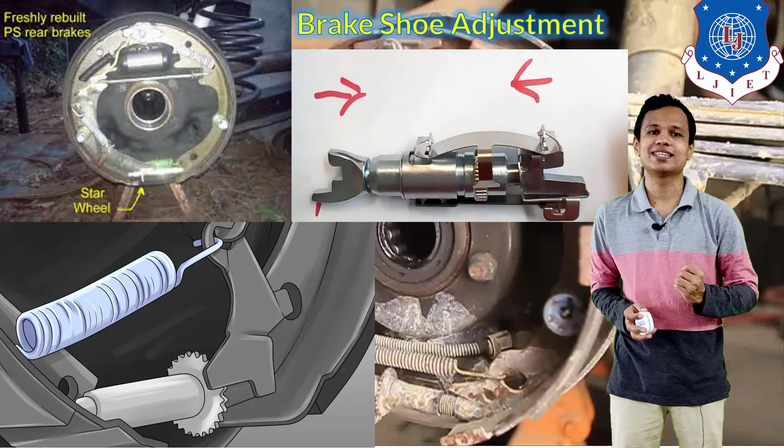First we will see about the brake shoe adjustment. This will be required whenever there is a problem in the braking effect, and in case of drum brakes. Whenever we apply the brakes, friction between the shoe and the drum causes the shoes to wear out over time. With this wearing out, the clearance between the drum and the shoes will increase, so to compensate we have to apply the brakes with extra effort. To reduce that effort and get better braking performance, the shoes will need an adjustment after some time.

The brakes we use nowadays have a self-adjusting system or self-adjusting shoe mechanism provided in them. But in older brakes, where the self-adjusting system was not provided, we require to manually adjust the brake shoes.

In the first figure, on the leftmost side, you can see a brake that is being freshly rebuilt. That rebuilt brake has the star wheel provided at the bottom part of the shoes. By rotating the star wheel, you can expand the shoes in the outer direction. For the adjustment of the brake shoe, we need to expand the shoes slightly to compensate for the clearance between the shoes and the drum.

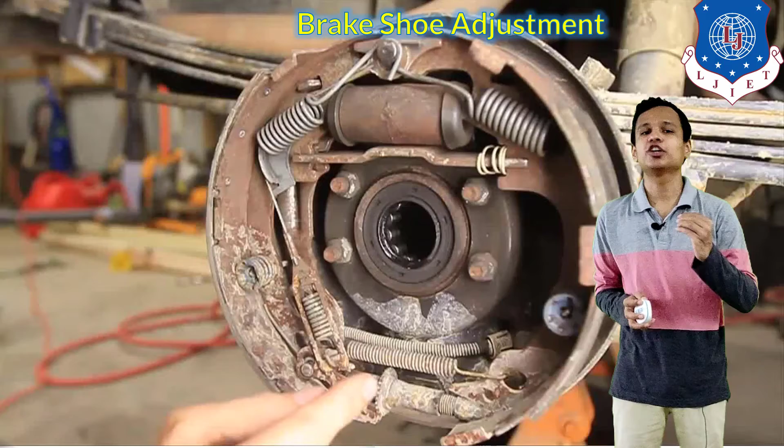Let's see the procedure for the brake shoe adjustment. The bottom part is the star wheel which is provided. To rotate the star wheel, we can simply use any object. First we have to release or loosen the nut from the back side, and that part, after loosening, can be used to rotate the star wheel.

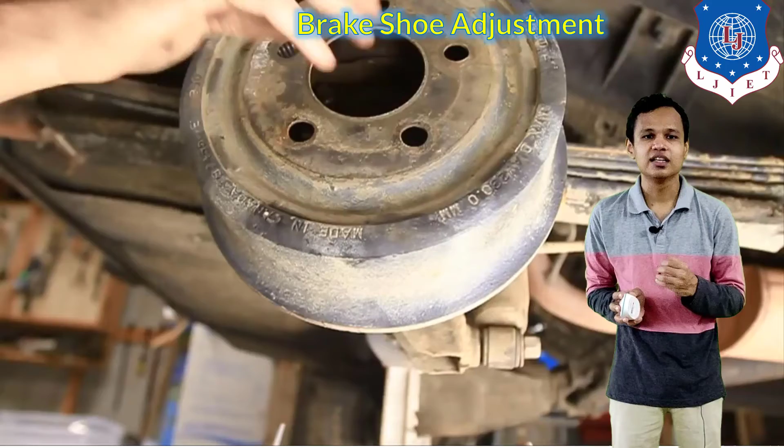The star wheel, with slight rotation, will keep expanding our shoes. As the star wheel is rotated, the adjustment gets corrected. After adjusting the star wheel, the braking effect is checked once again by applying the brakes. If it is not proper, the star wheel is rotated again, and after getting the required result, the brake shoe adjustment is completed.

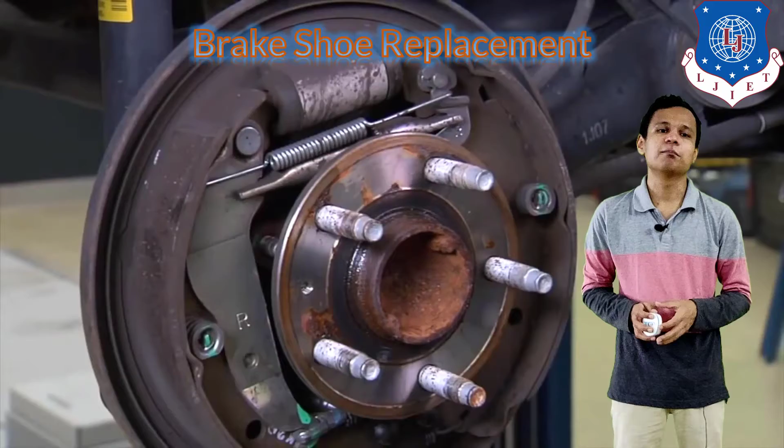Next is the replacement of the brake shoe. Whenever the shoe has become totally useless, the replacement will be done. First, the retraction spring connected to the brake shoe needs to be removed. After removing the retraction spring, the adjusting mechanism with the star wheel is removed. Then all the nuts connected to the shoes are removed, and one by one both shoes are removed from the system.

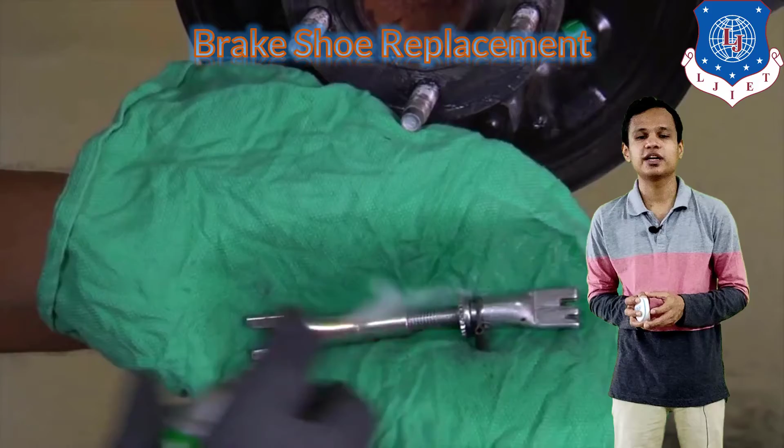After removing the brake shoes, the next thing kept in the system is the cylinder. That wheel cylinder will be kept on the back plate. After cleaning and required grinding and resurfacing processes, the procedures for the brake shoe replacement continue. The adjustment mechanism with the star wheel will also be resurfaced, and all required components will be replaced. After completing all procedures, the new brake shoe will be attached to the system.

After attaching the brake shoes, calibration is required for the new braking system. This calibration is done by adjusting the required position of the brake shoes, and after calibration we get the proper braking effect required in the system. This is how the replacement of the brake shoes is done in drum brakes.

Finally, the retraction spring is attached to the brake shoes so that after releasing the brake it can come back to its original position. Now you can see the calibration is done on the brake pad, and after calibration the force of the braking is checked.

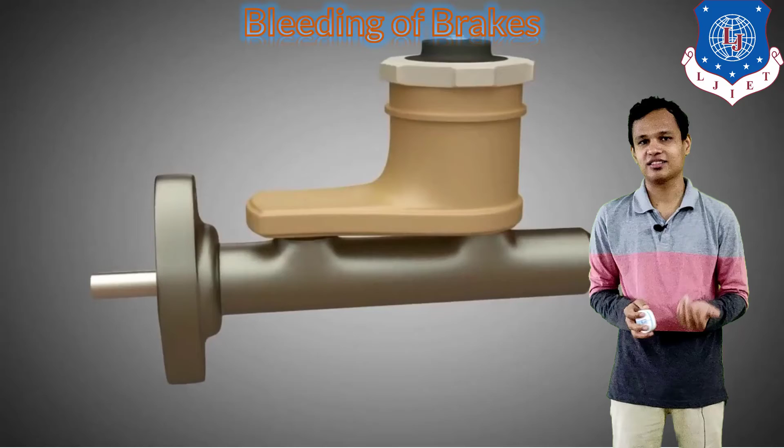Next is the bleeding of the brakes. Bleeding is required whenever there is air in the braking system. The air reduces our braking effort, and that effort is restored by bleeding the brake system.

Bleeding can be done on all four wheels of the vehicle, or one wheel at a time.

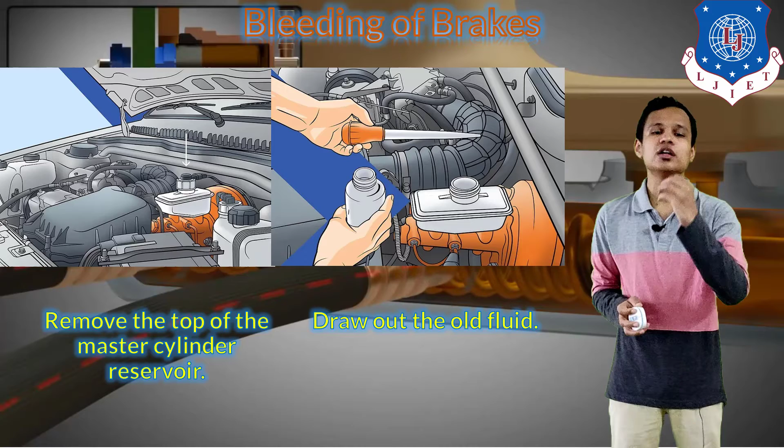First, we remove the top of the master cylinder reservoir. After removing it, we draw out the old brake fluid. Then we fill the master cylinder with new, clean brake fluid.

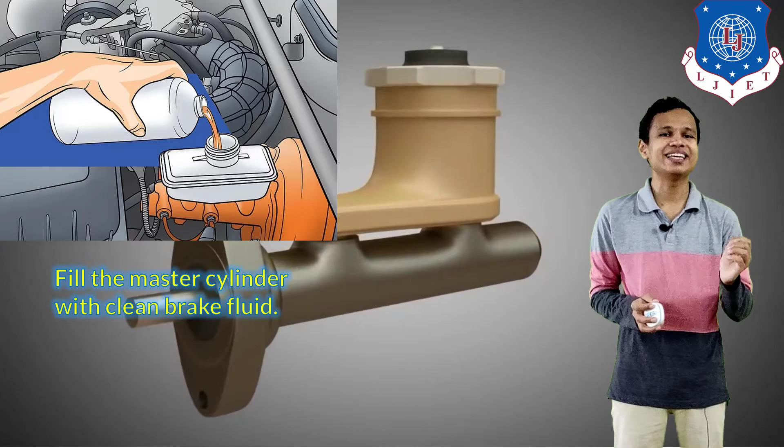We replace the top of the master cylinder reservoir with the new cap.

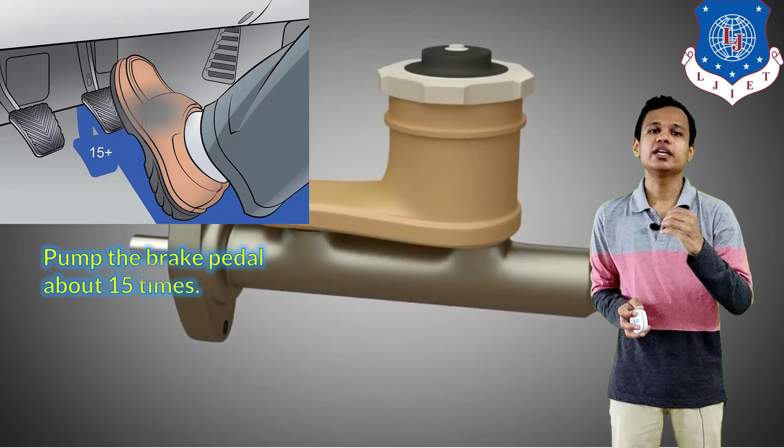After filling in the new oil, the next step is to pump the brake pedal about 15 times.

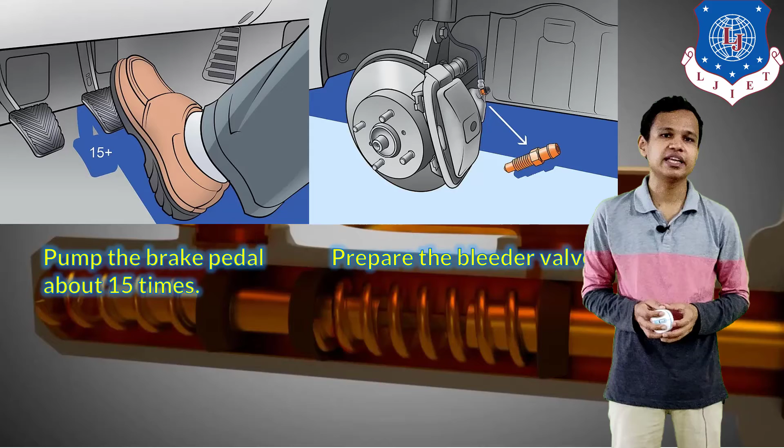Whenever we perform the bleeding process, we require two persons: one to operate the brake pedal, and the second to operate the bleeder valve.

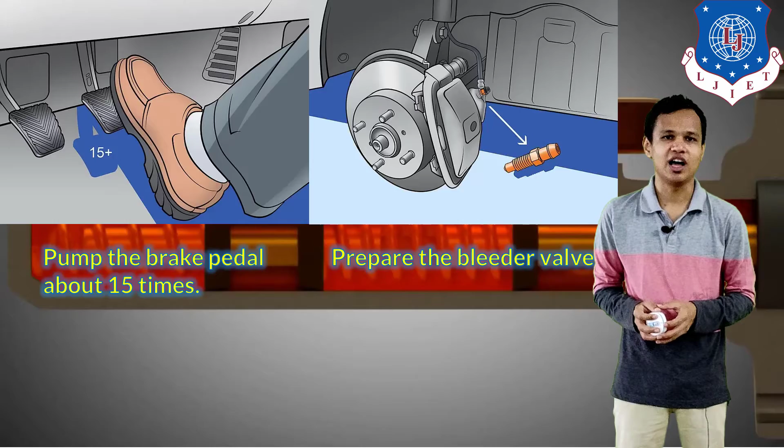Next, we jack up the car whenever we are ready to start bleeding the brakes.

After that, we put a tube on the bleeder bolt, starting with the tire that is farthest from the reservoir. We locate the reservoir, and the farthest tire is bled first.

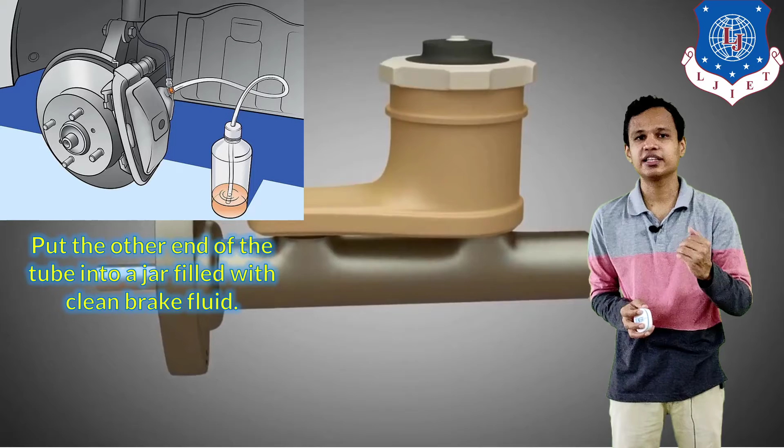After starting the bleeding process, we put the other end of the tube into a jar in which the brake fluid will be collected.

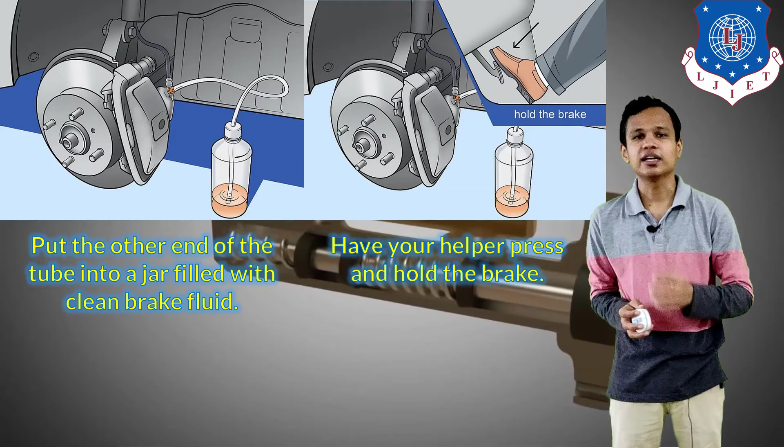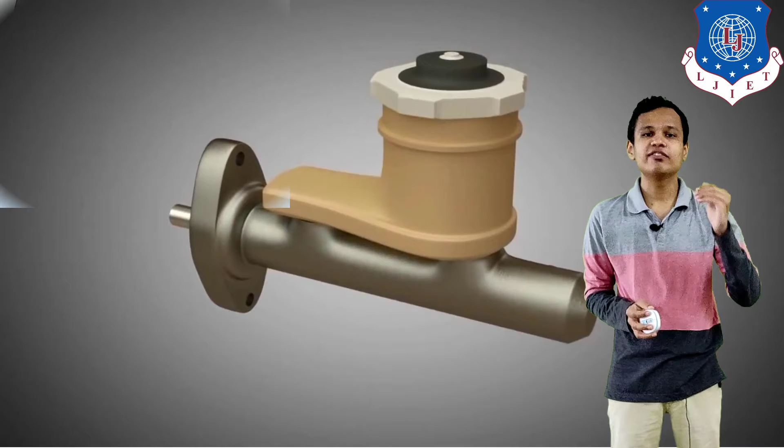After placing the jar, the helper or second person presses the brake and holds that pressed position. While he presses the brake, the bleeder bolt is turned a quarter turn to the left.

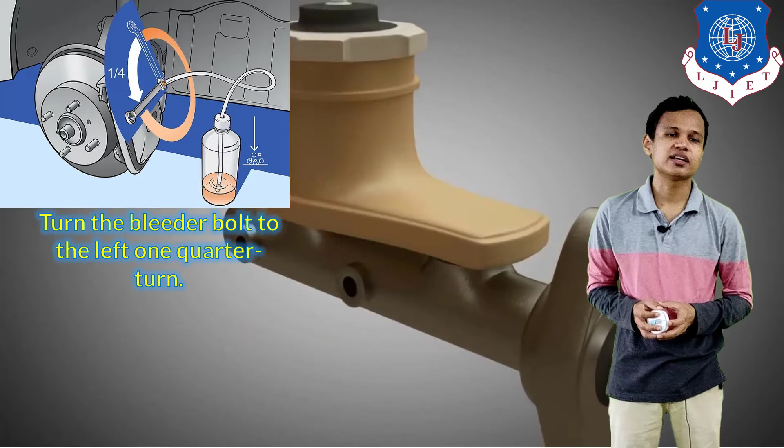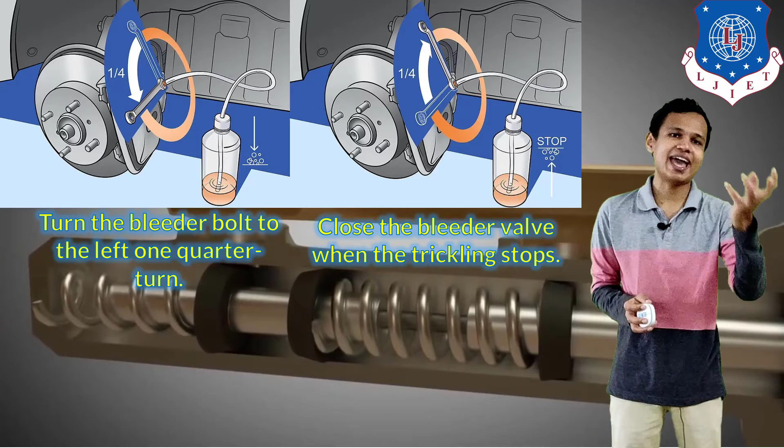After opening the bleeder, oil comes out through the tube and is collected in the jar. Along with the oil, air bubbles will also come out.

The bleeder valve is kept open until the bubbling stops. Once the trickling of oil stops, the bleeder valve is closed.

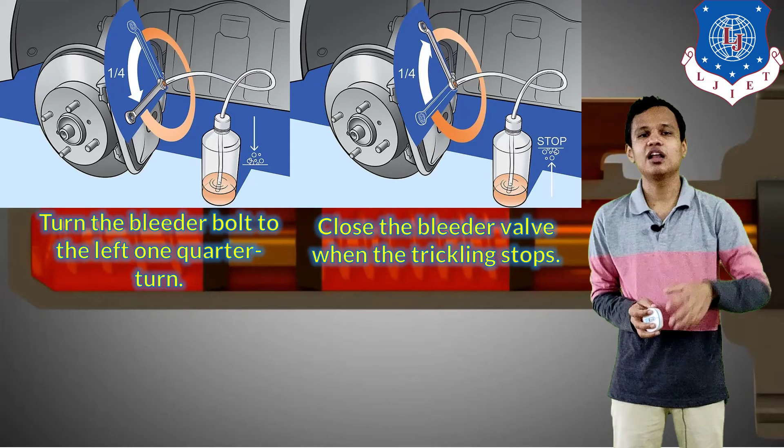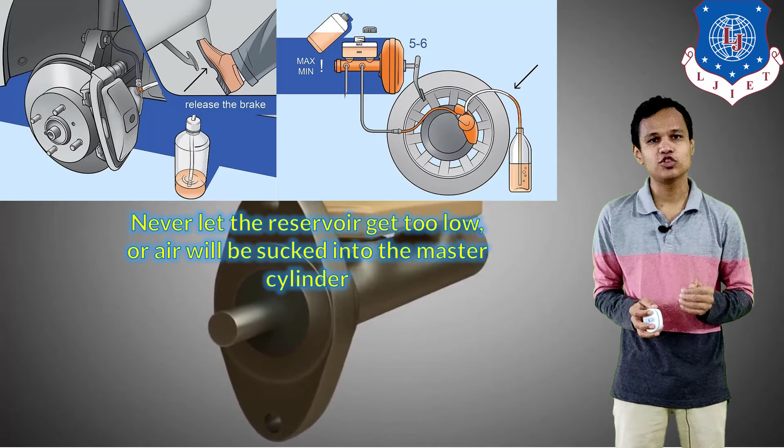Only after closing the valve can we release the brakes. If we release the brake while the bleeder valve is still open, air will enter through the valve, causing the opposite problem.

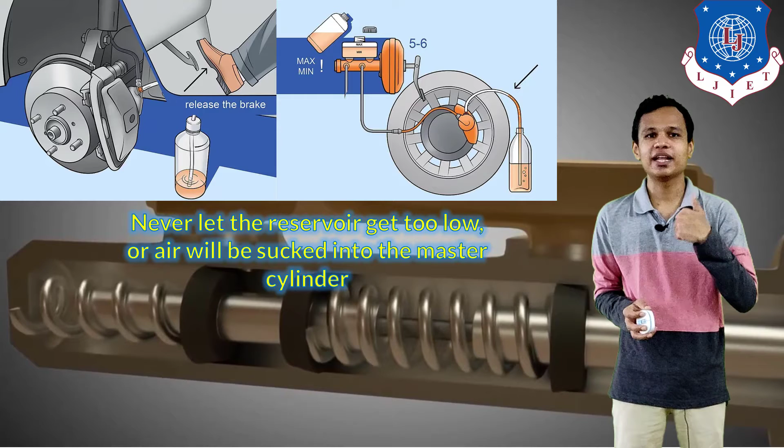This is why we require two people - because the bleeder valve can only be opened while the brake pedal is held in the pressed position.

This procedure must be repeated a minimum of 5 to 6 times so that all the air is exited from the hydraulic system.

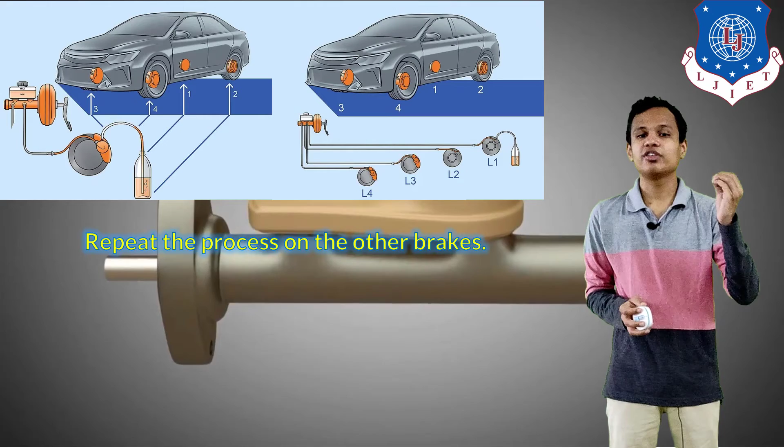We repeat the procedure for all the brakes, starting from the farthest tire and moving inward.

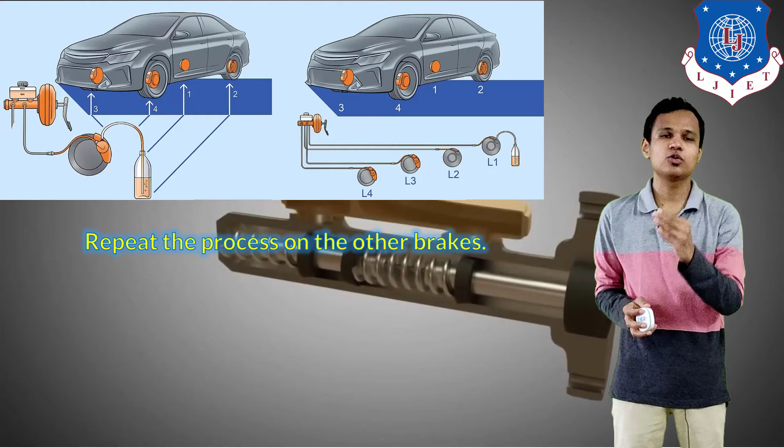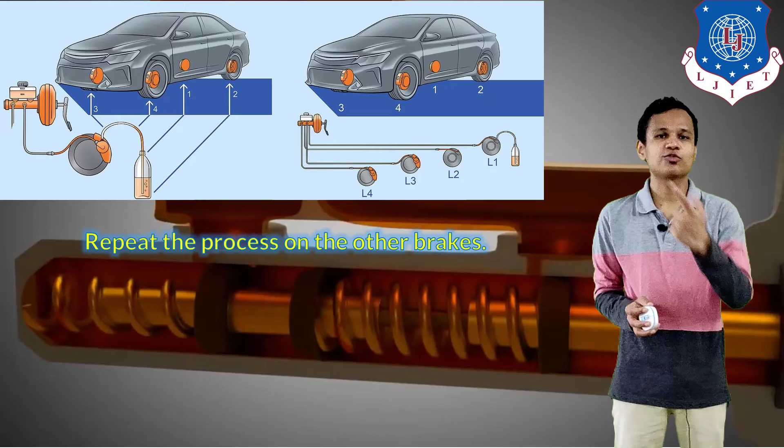As seen in the figure, the order is L1, L2, L3 and L4. The whole system is purged of air by following this procedure: starting from the farthest tire and moving to the nearest tire in a stepwise manner.

This is how the bleeding process on the vehicle can be done.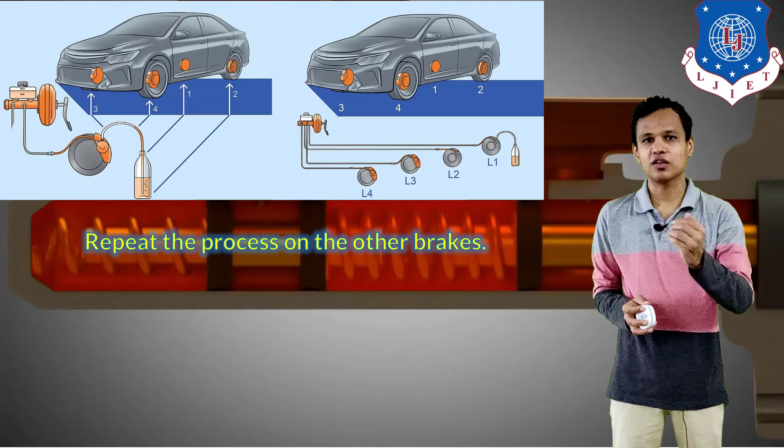Next is air brakes. Air brakes are a braking system widely used in heavy vehicles and bus systems.

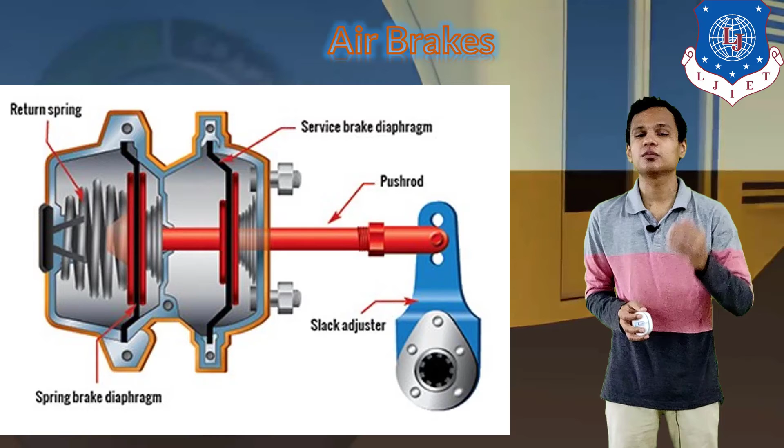Air brakes have three components: the air chamber, push-rod, and slack adjuster. The air chamber is used whenever we have a pneumatic system.

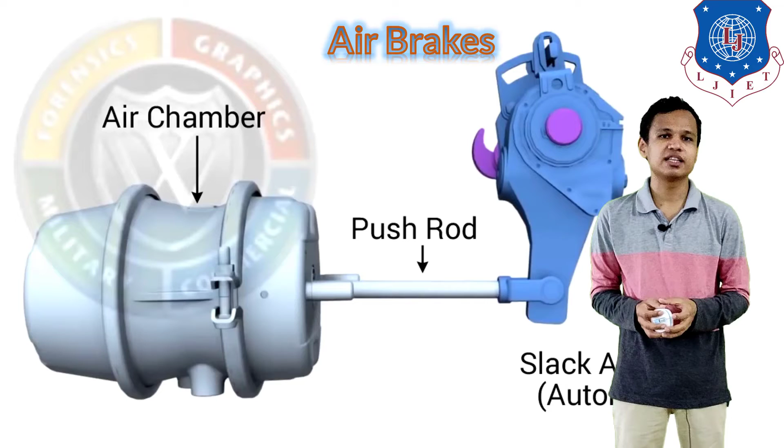The air chamber is connected to the push-rod, and the slack adjuster is connected to our operating mechanism. In this case, the S-cam is provided as the operating mechanism.

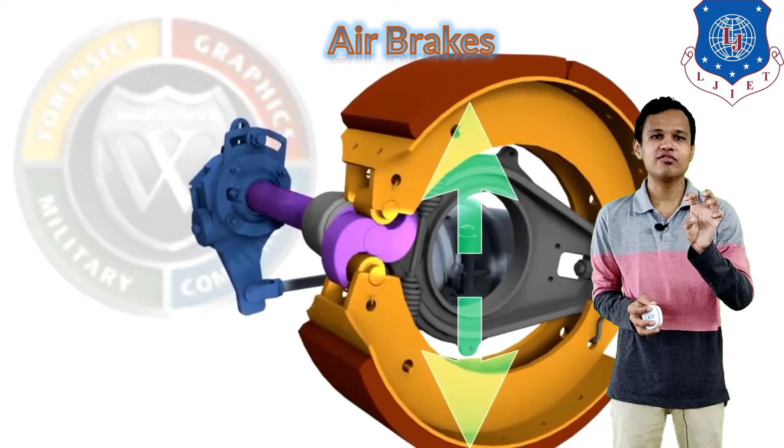The S-cam is positioned between the two shoes. Whenever we operate the slack adjuster by applying the brakes, the S-cam moves the two shoes outward, and this is how braking is obtained.

You can see what happens when we apply the brakes. When we push the brake pedal, the slack adjuster moves rightward, and the S-cam expands the two shoes. This is how we get braking when the brakes are applied.

If the slack adjuster is defective, the S-cam will not operate and braking will not be obtained. You can see that when the slack adjuster was defective, braking was not achieved.

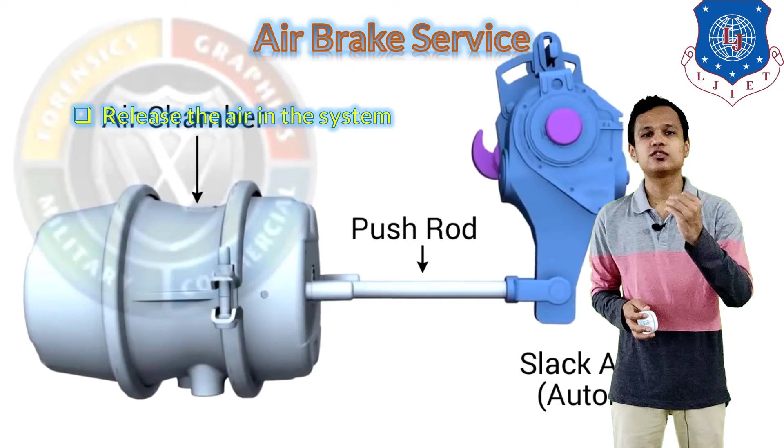In air brake servicing, there are a few points to keep in mind. First, we release the air in the system. Whenever we start servicing air brakes, we need to release the system air first. Second, we check the push rod.

If the push rod is faulty, we need to repair or replace it. Lastly, we adjust the push rod if it requires repair.

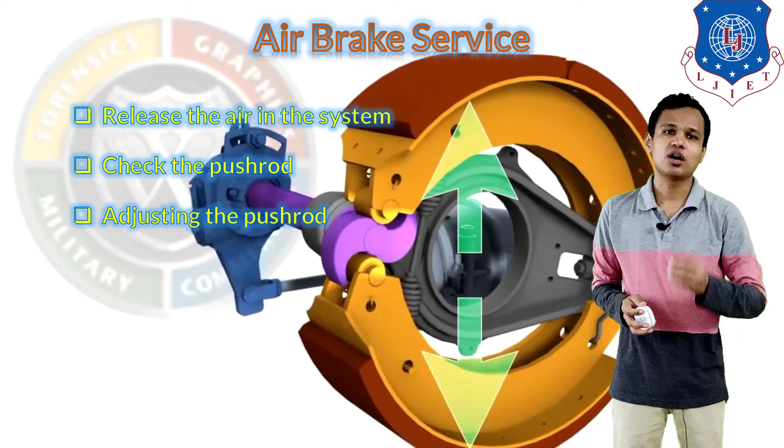In this session, we covered brake shoe adjustment, brake shoe replacement, the bleeding process, and briefly, air brakes.

In the next lecture, we will start with the maintenance and overhauling of various systems not yet covered. Until then, thank you so much.